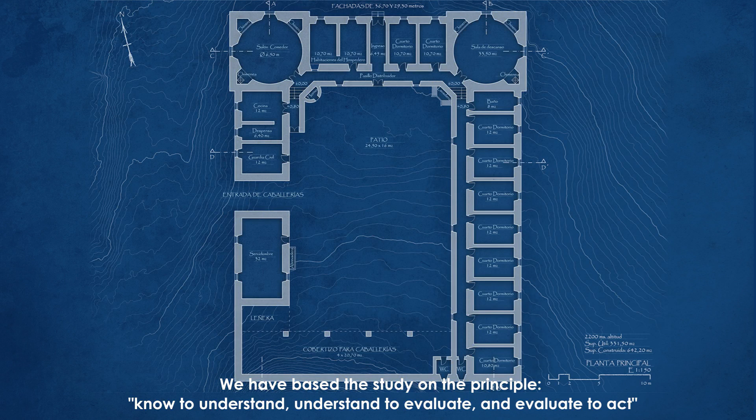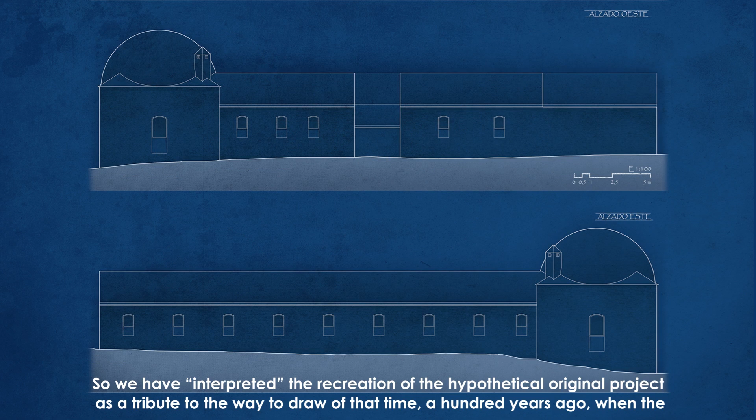We have based the study on the principle: know to understand, understand to evaluate, and evaluate to act, and on the use of graphical documents as support for our research and understanding, as well as a vehicle for the preservation and dissemination of heritage. So we have interpreted the recreation of the hypothetical original project as a tribute to the way of drawing of that time, 100 years ago, when the reproduction ways of technical documents were very different from today.

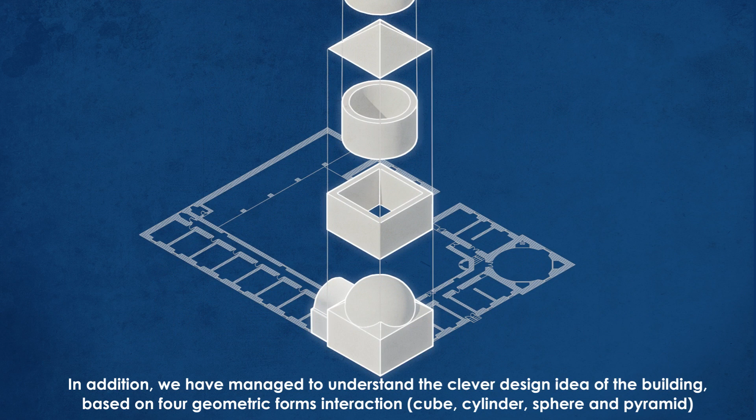By linking past and present of the drawing as a means of architectural expression and communication, we have managed to understand the clever design idea of the building based on four geometric forms interacting: cube, cylinder, sphere and pyramid, to achieve a robust and singular solution. The quadrangular and cylindrical walls interact between themselves to form a base on which the dome stands.

Since the initial idea was nearly none, this research is primarily supported by thorough fieldwork and systematic methodology. The building itself has been the main information source. Through an innovative data collection process, we have achieved a large comprehension of the building's architecture. From fieldwork and data collection outside and inside the shelter, we got our first understanding of its formal and functional characteristics.

But we wanted to go further and get a document as objective as possible, avoiding interpretations. Through photogrammetric techniques, we obtained a fully precise and reliable model of the building and the ground where it is sited. This digital model became a solid basis from which to investigate and understand the various historical stages of the building.

Photogrammetry allowed us to reduce the time required for fieldwork, only taking photographs by drone and a few control measures to give the 3D model a correct scale.

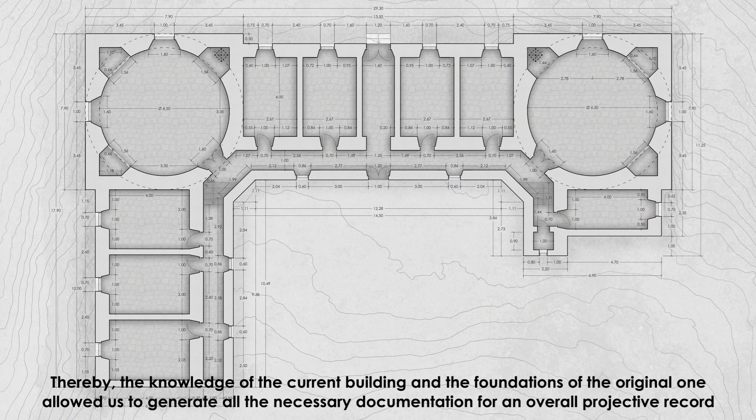On the other hand, due to the aerial orthophoto, the foundation shapes of the destroyed part of the old shelter came out, almost hidden to the naked eye. The knowledge of the current building and the foundations of the original one allowed us to generate all the necessary documentation for an overall projective record of the evolution and different stages of the building, supported by the most current graphical techniques of architectural expression and communication.

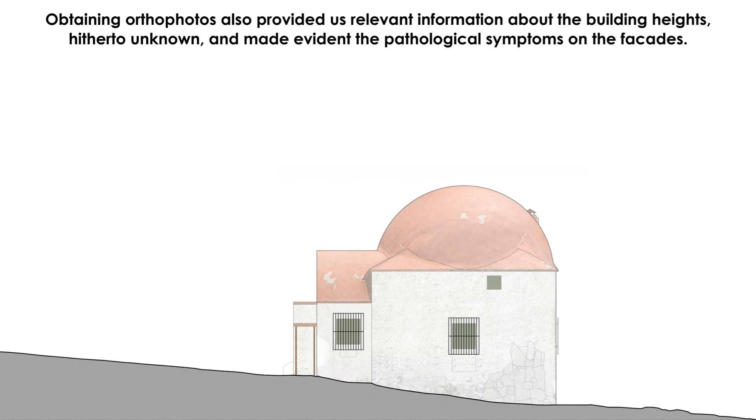Obtaining orthophotos also provided us relevant information about the building heights, hitherto unknown, and made evident the pathological symptoms on the facades. The analysis of direct sources, namely the information provided by the building itself in its current state, is an essential step before the historical research.

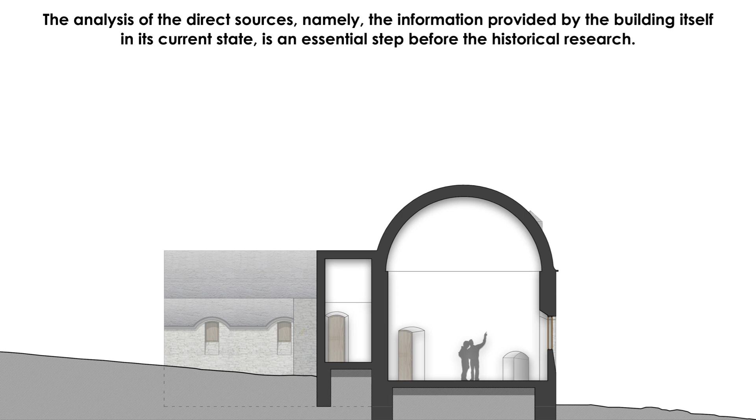Definitely, the virtual models made during the investigation became intangible heritage, giving us the possibility to know and show in its original state a disappeared historical building through the drawing.

Therefore, these drawings should be understood as a whole knowledge process. Infographics is then a scientific research means, but especially it is a useful vehicle for all the information we have gathered during our research, because the results become available to the general public.

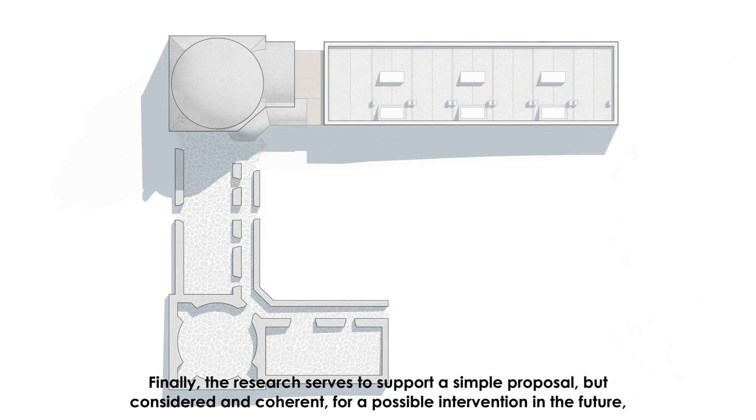Finally, the research serves to support a simple proposal, but considered and coherent, for a possible future intervention, with the purpose of the restoration and rehabilitation of a new San Francisco shelter. It is made with the maximum respect for the heritage value of the subject matter, its present and past, but without giving up the future.

It will be a starting point for a debate about the necessary recovery of a unique piece of our heritage, which is currently at risk.

With this research, we have tried to contribute inconspicuously to rescue from oblivion a mountain heritage which is part of our collective identity, and to help recover, as a building of historical interest, the first shelter built in the Sierra Nevada mountain range. Our duty is to preserve, protect, and transmit the legacy we have inherited. We must not let oblivion destroy it, nor allow it to be lost through ignorance.